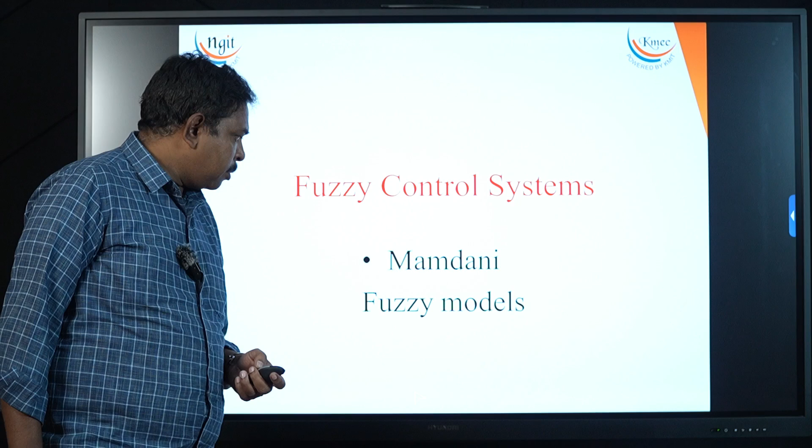In 1975 Ebrahim Mamdani designed this kind of fuzzy inference. It was designed to control a steam engine and boiler combination. People who work in that environment know the rules of that environment, so they know how to infer a new thing by repeated processing of these rules.

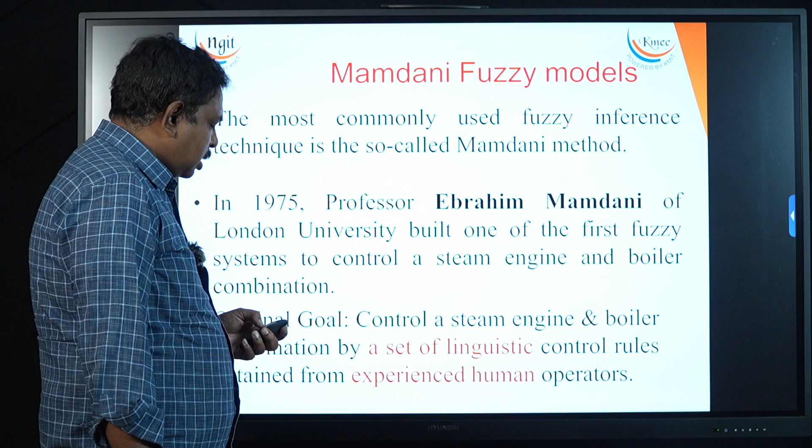He was inspired by that, and he prepared this procedure for how a fuzzy control system works with the help of rule evaluation. So he performed this Mamdani style fuzzy inference process, which means the process of making conclusions or making decisions.

In an environment that is uncertain, where we can't expect or predict the outcome, an imprecise environment where crisp decisions are always difficult, how should a fuzzy control take a decision with the help of rule evaluation?

The first step in Mamdani fuzzy inference is fuzzification of the input variables. Second step, rule evaluation. Third step, aggregation of the rule outputs, and finally fourth step, defuzzification. So what is a fuzzy inference engine in this control system? It basically uses if-then type fuzzy rules that convert fuzzy input to fuzzy output.

Suppose a crisp input, like a control system has to take a decision based on one crisp parameter x bar. Now here we define some rules. If x bar is a1, then y is b1. That is the consequent. If it is a2, then y is b2. If a3, y is b3.

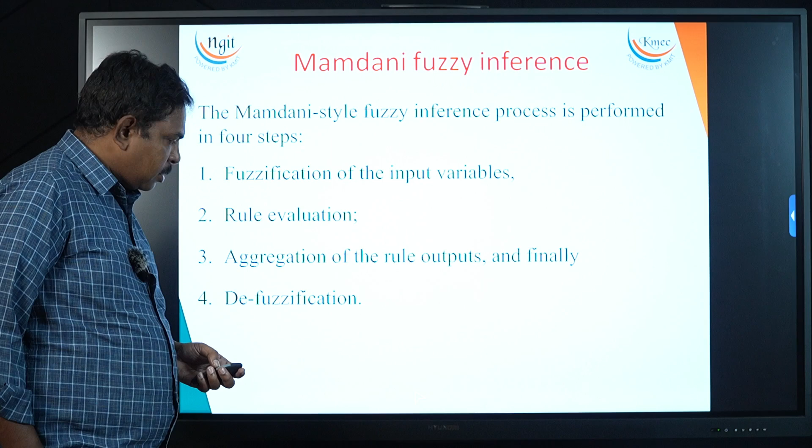what we do is apply a membership function to these fuzzy rules. For each rule I give a membership function. A membership function basically assigns values to the fuzzy set. I think we already discussed how a membership is assigned. So based on the strength of those memberships, the rules that we defined can be shown as pictures.

Here I defined the rule: if x is a3 or y is b1, then z is c1. For this rule, for the variables a3, b1 and c1, I assign a membership function. The membership function gives how much strength this variable has in this particular rule, meaning how much it can impact that rule. Like this, membership values are given to each one.

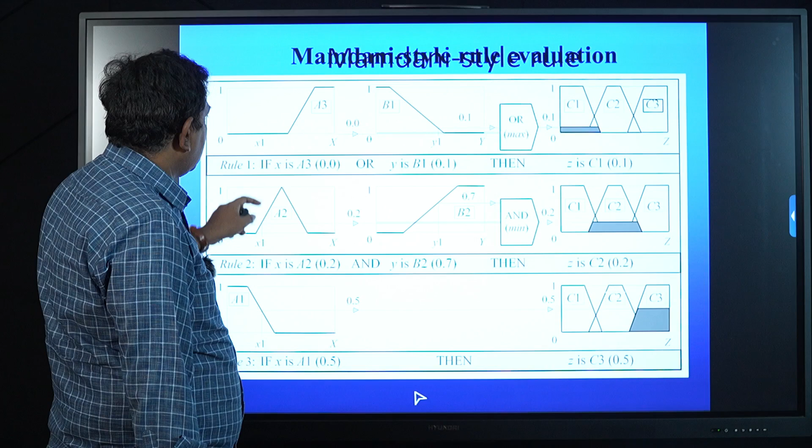So if x is a3 or y is b1, here or, in terms of fuzzy logic, is a union of two rules. Nothing but here I am performing a union of membership values.

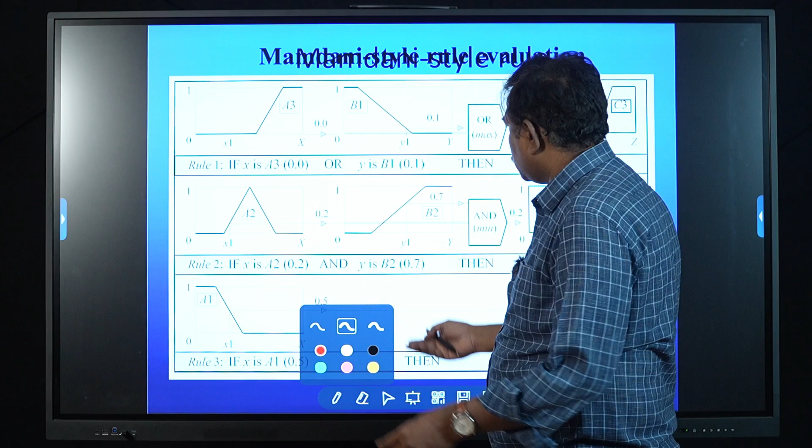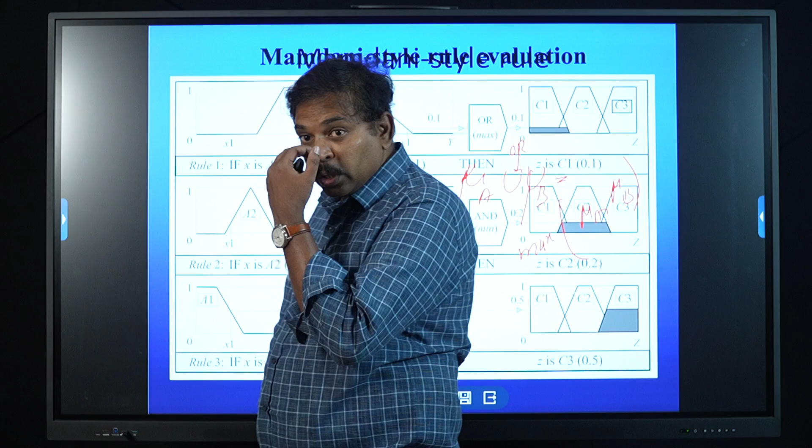In normal crisp sets, union is a collection combining these two sets. But here, suppose mu of A union mu of B, meaning a membership applied on A, union membership applied on B. OR is always shown with the union. That is nothing but the maximum of the memberships, mu of A comma mu of B. So in that case z is in [0, 1], meaning OR indirectly is nothing but a union of membership values assigned to Z.

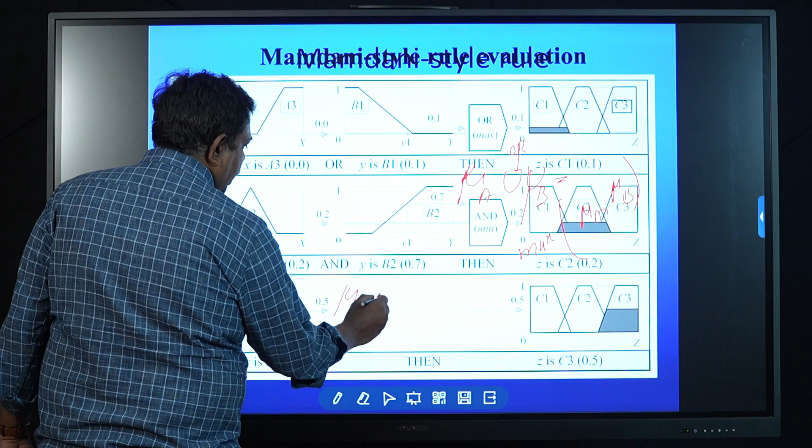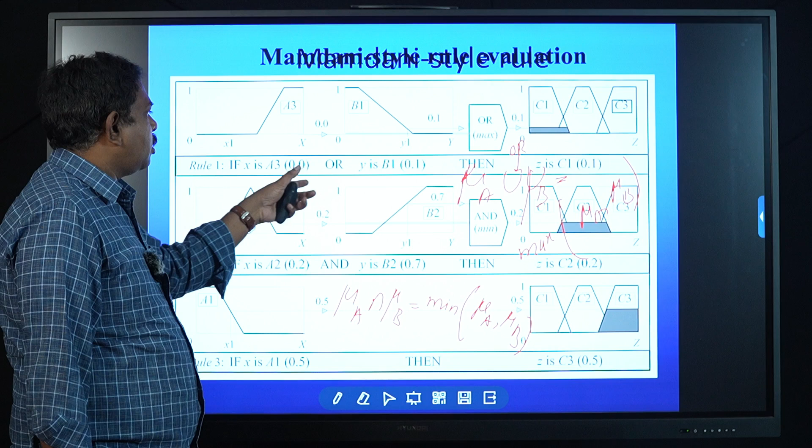Similarly, AND means conjunction of membership, like mu of A and mu of B. In normal crisp sets, it's the intersection of two sets, but here in fuzzy sets, this is nothing but a minimum of the assigned values. Now here it takes a 0.2 value. Like this, for every rule, membership is assigned rather than directly giving; a rule is evaluated first with the help of membership values, whether it satisfies based on the AND, OR and conjunction, and finally a new decision is taken, like if A3 or B1 then C1. To get this inference, it should satisfy the associated membership values of that function.

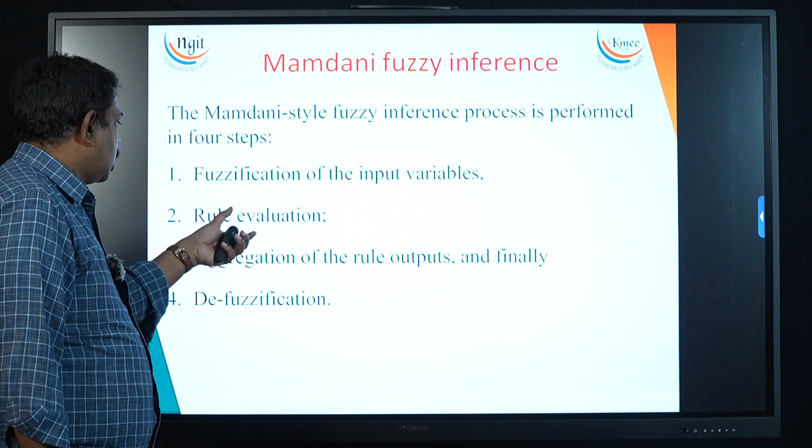So after this, whatever output we got is again defuzzified, meaning finally my fuzzy control system should send a crisp set. Each rule is evaluated by assigning membership function values to each variable participating in that rule. Finally, their fuzzy output strengths are combined together by the aggregator and sent to the defuzzifier. The defuzzifier gives the correct action that should be performed. Here x is the input, it can be A1, A2, A3; what it should perform is decided by the defuzzifier. So these are the 4 steps involved in the Mamdani approach of fuzzy inference: fuzzification of the input variables, rule evaluation, aggregation of the rule outputs, and finally defuzzification.

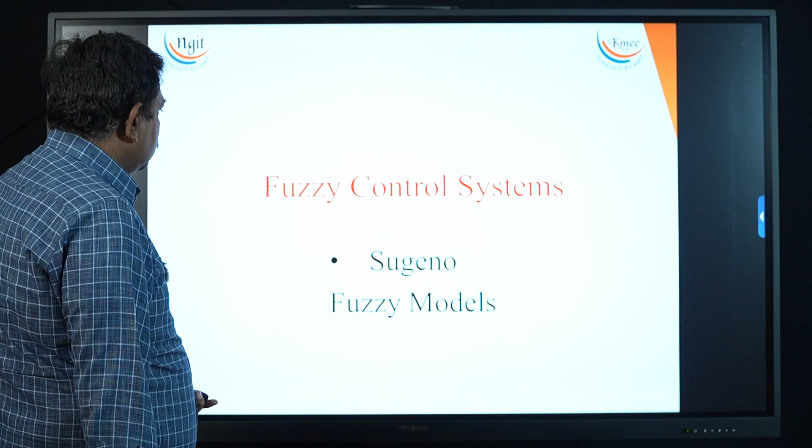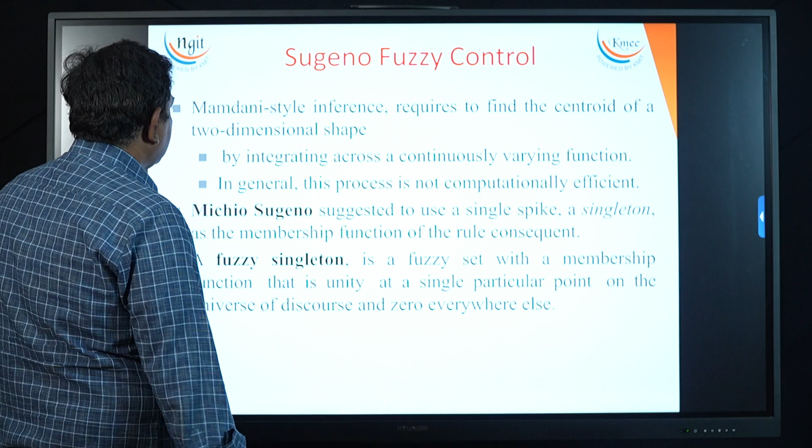Another approach of fuzzy logic inference is Sugeno fuzzy models. We also call it the TSK fuzzy model, Takagi, Sugeno and Kang, 1985. They also followed the Mamdani approach, but instead of this consequent, they gave a function. If x is A and y is B, then z is a function of x comma y. Rather than directly giving a membership value to z, we calculate the relation between x and y, and then take the decisions. The consequent is a mathematical function. So these are the same fuzzy rules, with a small change in the right side of the rule. Instead of a fuzzy set, he used a mathematical function of the input variables.

The most common is the zero-order Sugeno fuzzy model: if x is A and y is B, then z is k, where k is a constant. Generally, in fuzzy rules of the TSK model, A and B are fuzzy sets, and the output function gives a crisp value. A crisp function means that before making a conclusion, we also try to study the relation between the input variables that participated in this rule. That is the basic logic.